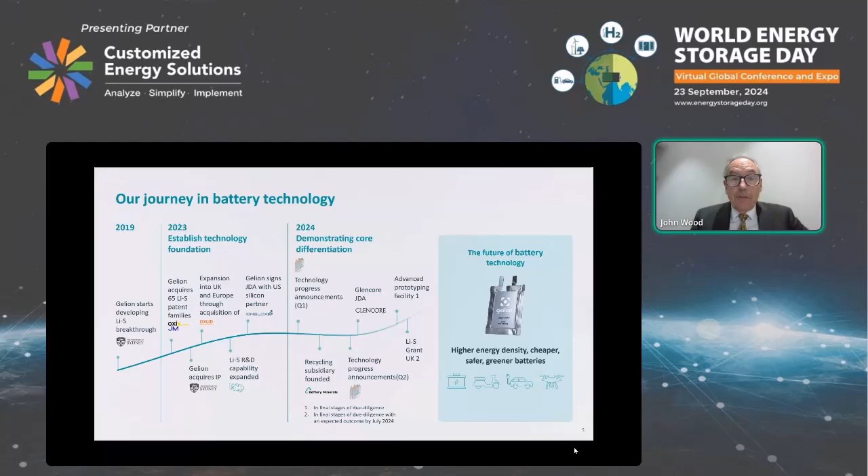Energy from Johnson Matthey. We then also acquired a wonderful team in the UK, Oxlid, led by Adrian Amiguez, signed a partnership with Ionblox to do silicon sulfur development, and have been expanding and building out our capabilities ever since. We see a future of higher energy density, cheaper, safer, greener batteries.

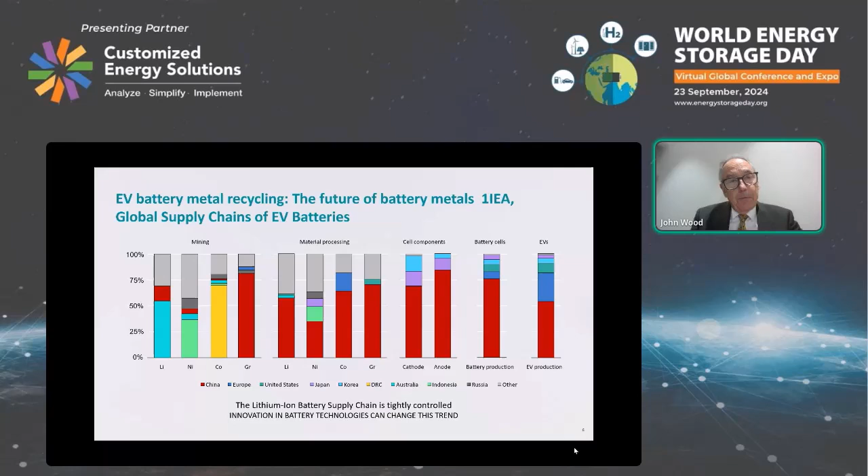We also see a future with changes to the supply chain. So I put up here a slide of today's supply chain. You can see that much of that supply chain is controlled, and that supply chain is dependent on the prevailing technology, which is intercalation.

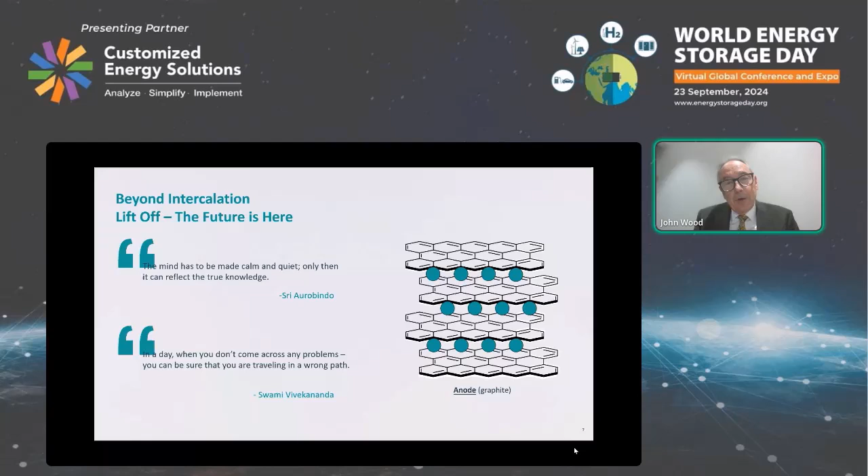And of course, intercalation is such a powerful method of storing energy in batteries, with the ions going from the anode across the cathode and back in between the plates. It's very, very effective. But I've got a couple of philosophical quotes here for you, because sometimes you need to think outside the boundary.

And there is a lot in the world that is beyond intercalation, and looking beyond intercalation offers an interesting future. I like this quote by Bruce Lee: if you put a limit on everything you do, physical or anything else, it will spread into your work and your life. There are no limits, there are only plateaus, and you must not stay there. You must go beyond them.

And so I see that the industry must also look beyond intercalation. Of course, there is alloying, which offers a path to higher energy density with safety. There is plating, which offers the highest energy density. And then on the cathode side, there's the ability to move to conversion cathodes. I'm going to talk a little bit about sulfur conversion cathodes, which have higher energy density, are very safe, and of course, sulfur is super abundant.

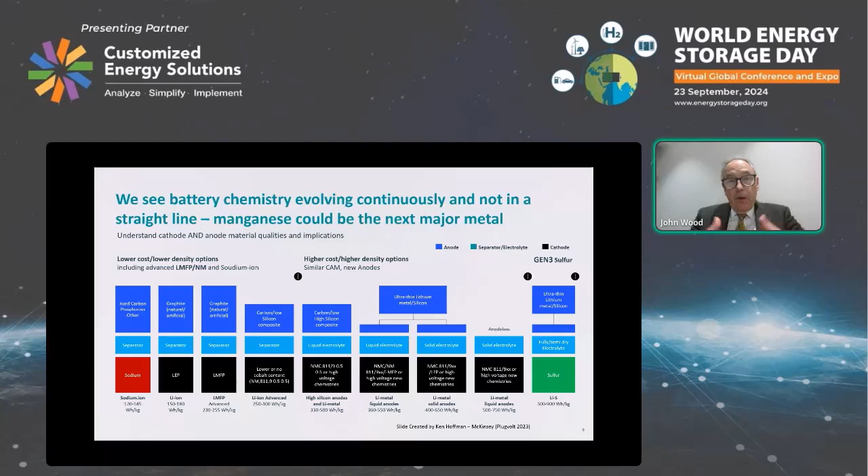This is a great slide that was created by Ken Hoffman at McKinsey, so I'll give the credit for this slide to Ken. He used it at Plugvolt 2023. When I look at this slide and underneath it, I see a picture where our industry is today based around intercalation.

And as we move up into higher energy densities, we start to look to plating technologies and alloying technologies. You can see down the bottom the different applications, and on the left side sodium, and on the right side sulfur conversion. But I see a future for our industry where things change up.

What happens if you take a sodium intercalation cell and you add an alloying anode? That's a remarkable breakthrough by a group in San Diego called Unigrid, Darren Tan. You end up with a cell that has higher volumetric energy density, and so you move sodium up the spectrum there.

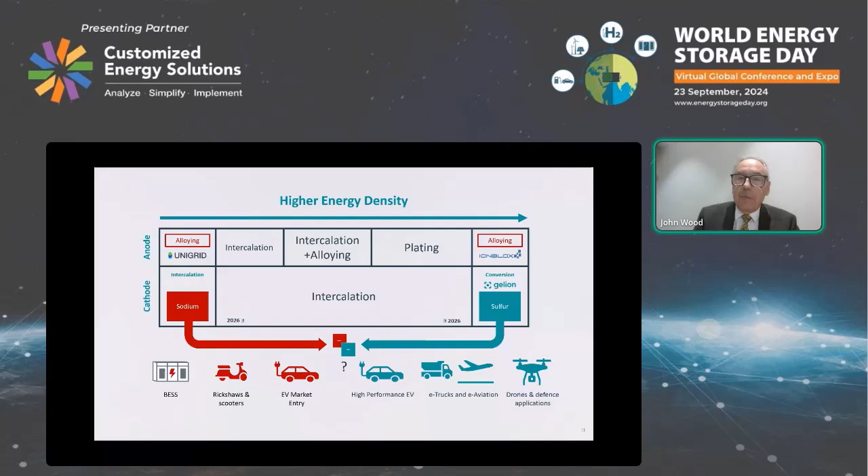And then what happens if you take an alloying anode and you add the stability of that alloying anode with the high energy density to a conversion cathode like sulfur? Now you start to get a cell that has super high energy density, but that can cycle really well. So looking at this slide, I see a very vibrant future for our industry of energy storage, where we're not restricted by intercalation. We make use of intercalation, but also start to make greater use of alloying, plating, and conversion as well.

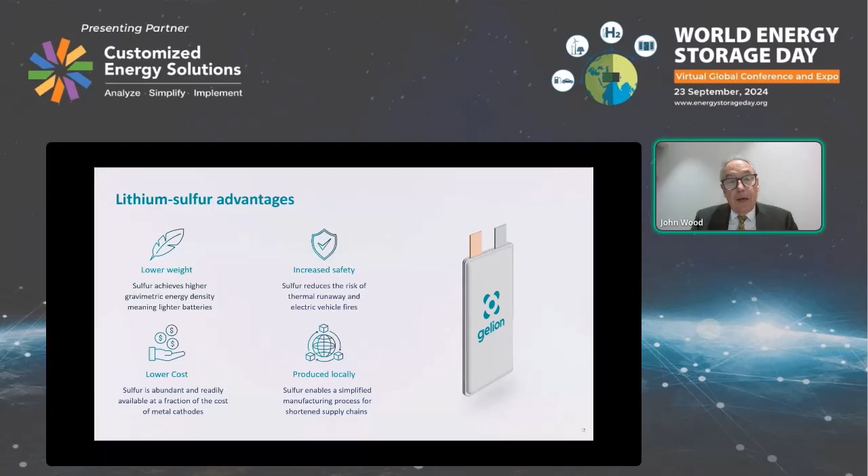Some of the advantages of lithium sulfur: it has a great gravimetric energy density, much lower weight. It has increased safety, reduces the risk of thermal runaway. Lower cost, since sulfur is abundant and available at a fraction of the cost of metal cathode materials. And it can be produced locally, with materials sourced all around the world.

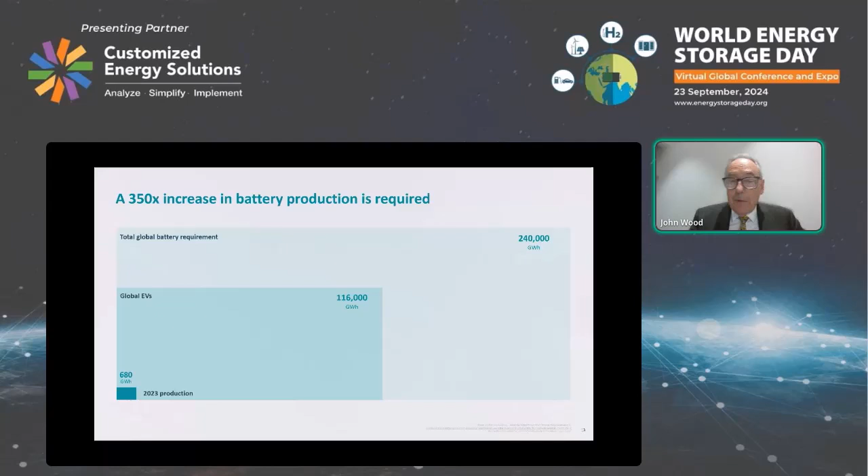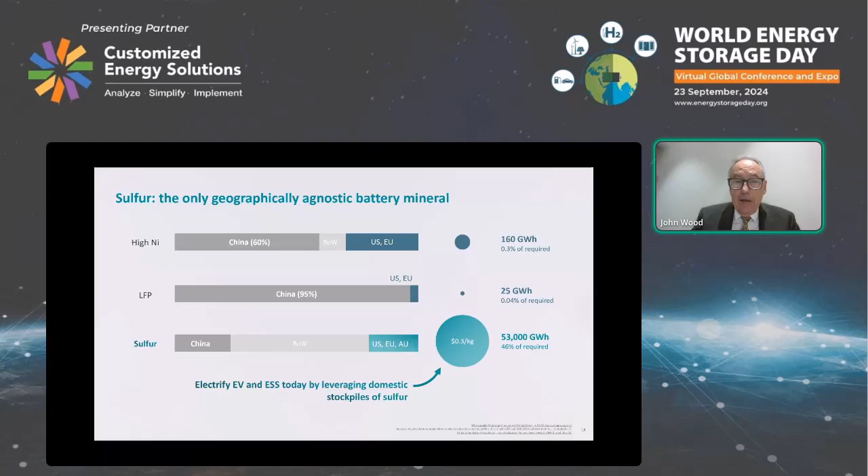We know that we need a 350 times increase in battery production, and we always want to make batteries perform better with higher energy density. Well, this is somewhere that sulfur absolutely shines. We have abundant sulfur, and it's really, really cheap. So if we can unlock the value of this resource, with 10% of the sulfur being released each year, we can provide all of the world's 2030 ESS and EV-based battery needs.

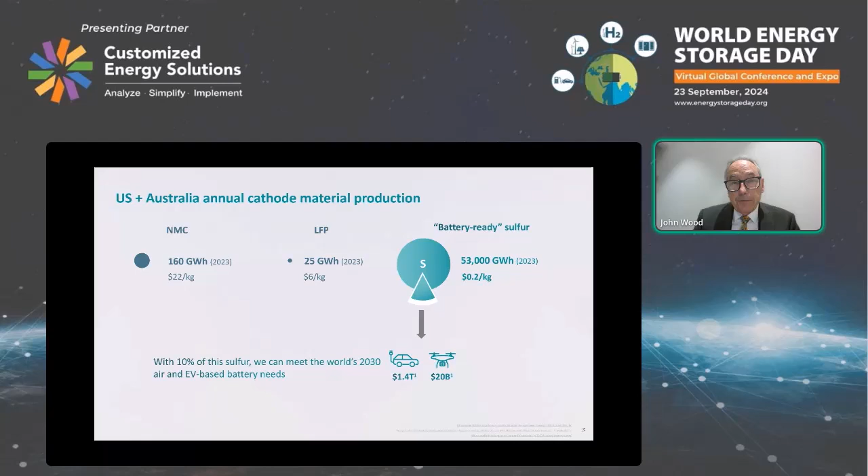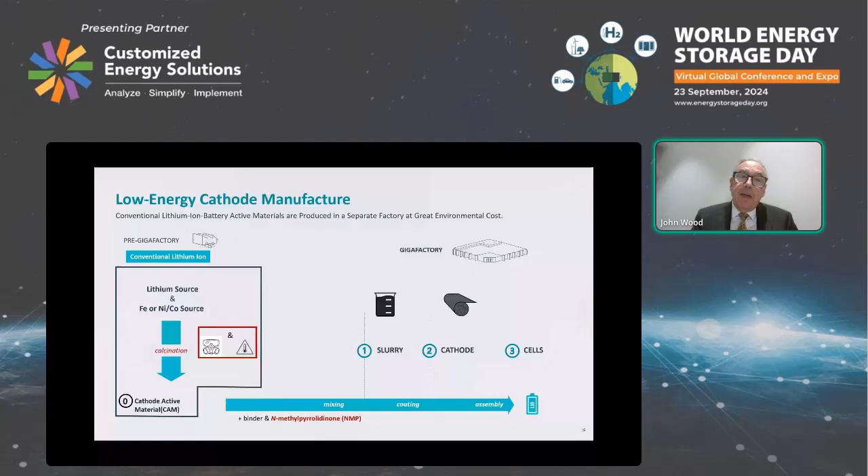Now I'm going to look at the supply chain from a slightly different perspective here. I'm looking at traditional, conventional lithium-ion battery materials and the challenges associated with cathode production. By shifting from conventional lithium-ion cathode to lithium sulfur, we can significantly simplify the production of the cathode.

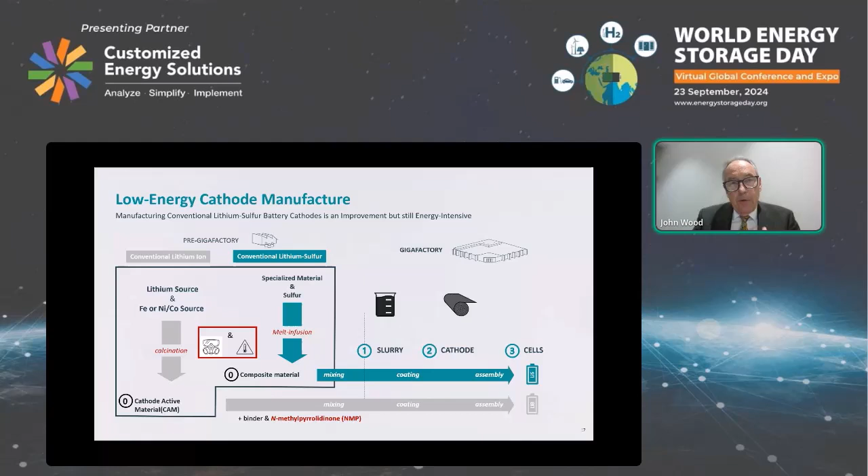But Gelion is taking this even further due to the remarkable work out of our team in Sydney and our team in the UK under the leadership of Lewis Adriansons and Gareth in the UK. We are actually developing methods of self-assembly of the cathode materials in the factory itself. What does this mean? This means a future supply chain opportunity where the cathode could be self-assembled from raw materials under ambient conditions within the gigafactory mixers.

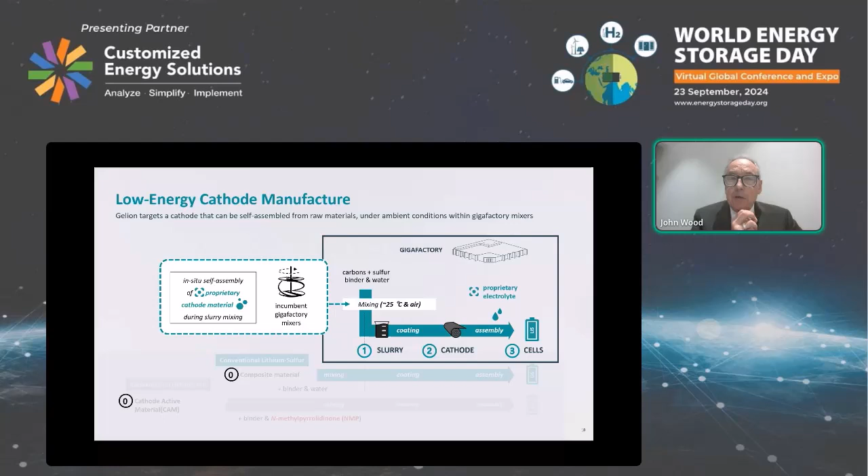Now this changes a lot. Remember, we're dealing with a super abundant material, a low energy process, and now self-assembly. The environmental benefits are phenomenal. These are all things that we need to start looking at: the carbon debt of production, the cost of production. So huge environmental benefits, dramatically reduced cost, non-specialized ingredients, no NMP, and a capex reduction.

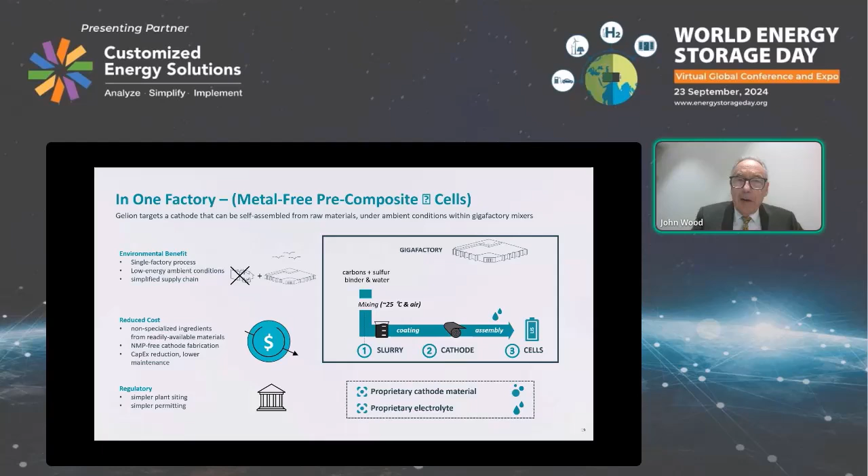And then, of course, by taking the nasties away from the process, we get simpler plant siting, simpler permitting, basically simpler regulatory requirements. So we see the impact of sulfur chemistry not just in performance, making higher gravimetric energy density cells, not just in abundance, but as offering a path to significantly reduce the carbon debt associated with making batteries. And I've got a slide here.

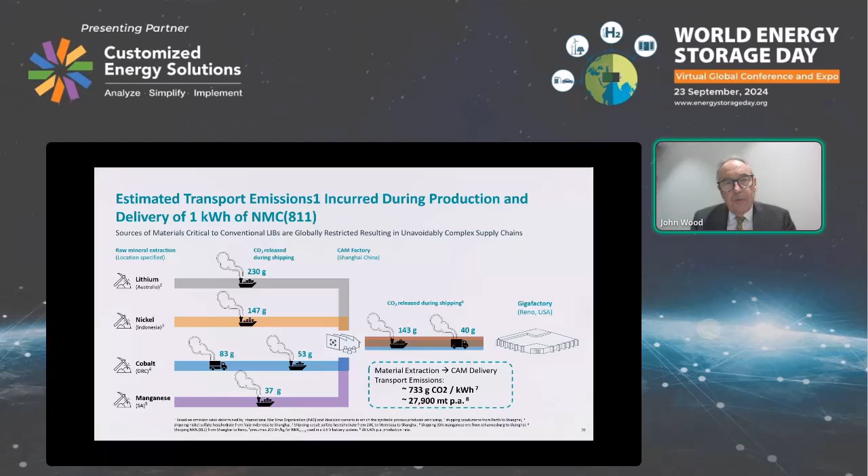So here's a comparable scenario. If we were to move to a sulfur type approach, basically the cathode material is sulfur, carbon, and binder. Here you can see those numbers are significantly lower, around 24 grams of CO2 per kilowatt hour, or about 912 metric tons per annum.

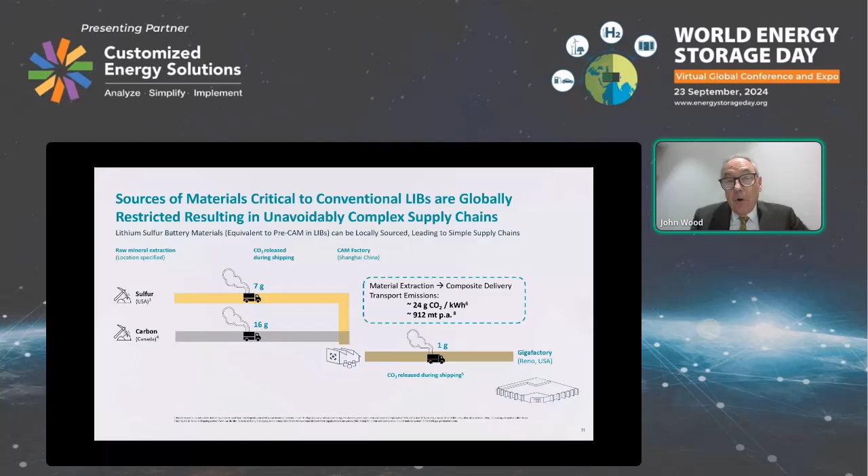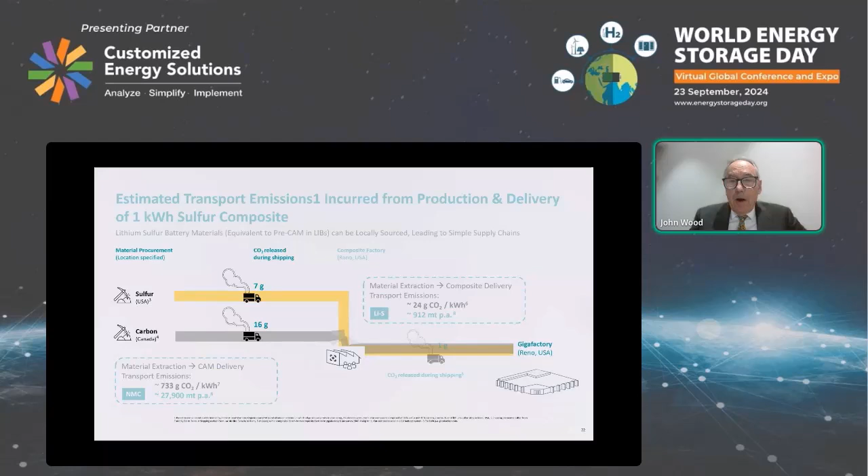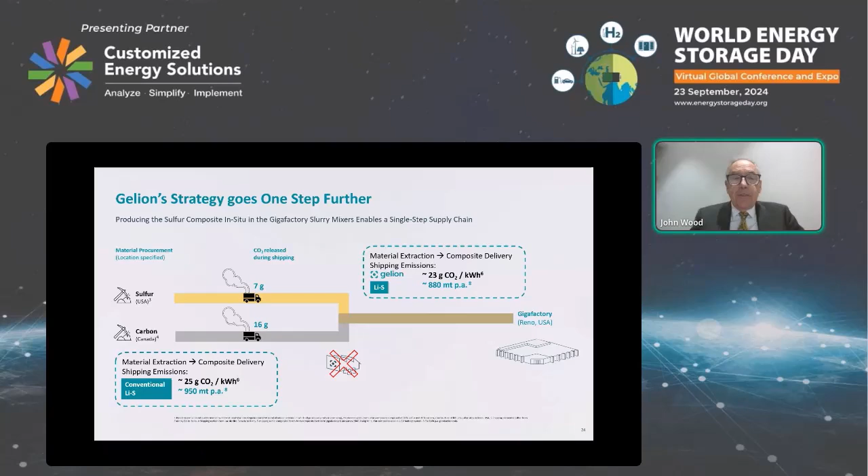The numbers here are huge as we start to scale our industry. So if I put that in context for you, Gelion takes it one step further with this self-assembling approach, meaning even less CO2 is produced in the course of making that cathode material. Looking at the comparison, in the future sulfur offers a path where we can go from 10.36 kilograms of CO2 per kilowatt hour in making NMC to around 0.023.

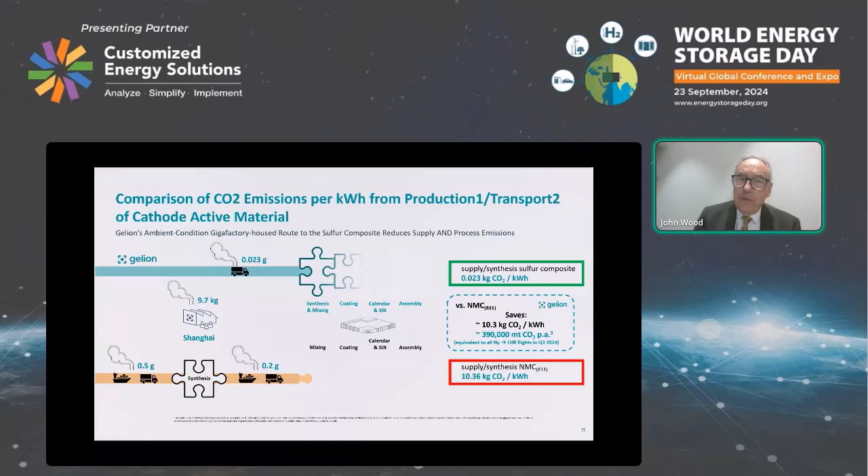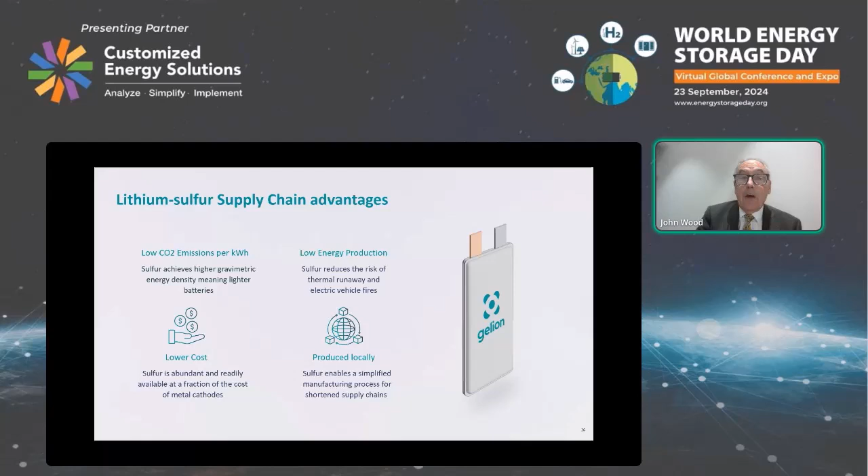And this is going to become increasingly important. So I started off introducing for you the concept of lithium sulfur advantages in terms of high gravimetric energy, safety, and abundance. But I want to also give you that picture of the future supply chain, that there is enough sulfur in the world to actually meet the long-term energy durations we need, to meet the transport and volume of transport we need, and also the supply chain advantages. Yes, you can get the materials where you are. Yes, it has very low CO2 emissions, low energy production, lower costs, and produced locally.